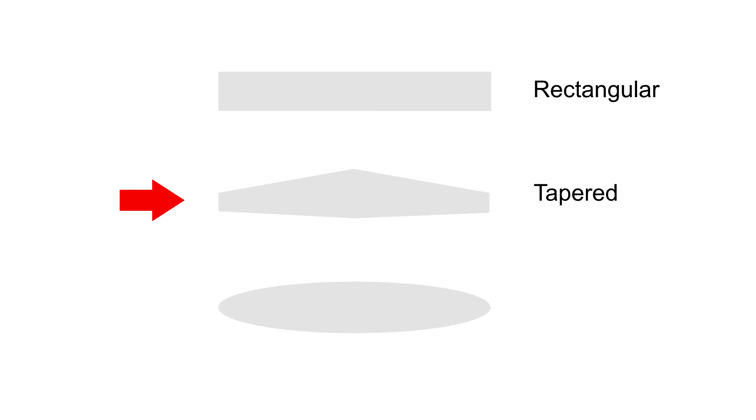Step 1 was to choose a type of wing. There are 3 main types: rectangular, tapered, and rounded. The rectangular wing is used on trainers and light aircraft for simplicity and good performance, because it's simple to design and build, as we only need to make one straight cut.

It also has good low-speed performance and gentle stall characteristics. A stall happens when the airflow separates from an airfoil, which causes the airfoil to lose its lift, which is not good for an aircraft.

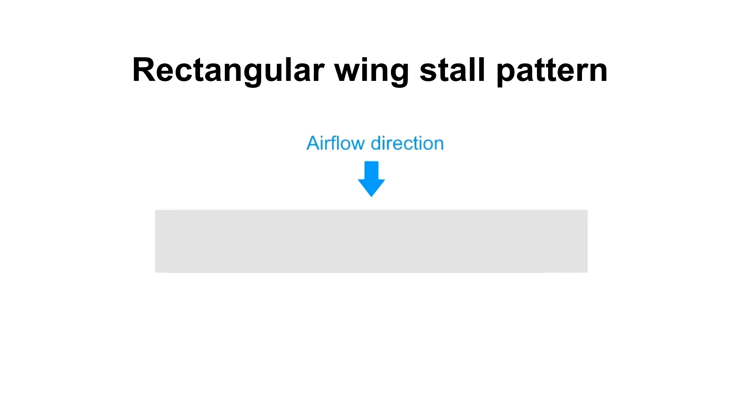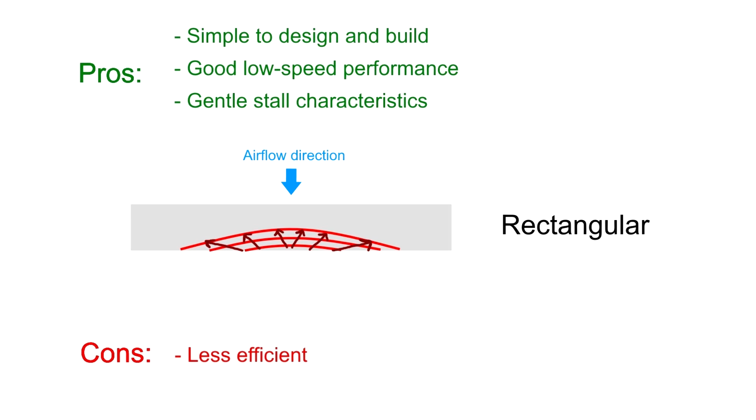In rectangular wings, the stall starts from the root, which means we have plenty of time to react, because the ailerons remain effective when we need them the most, and the stall isn't aggressive. But rectangular wings are less efficient than tapered and rounded wings.

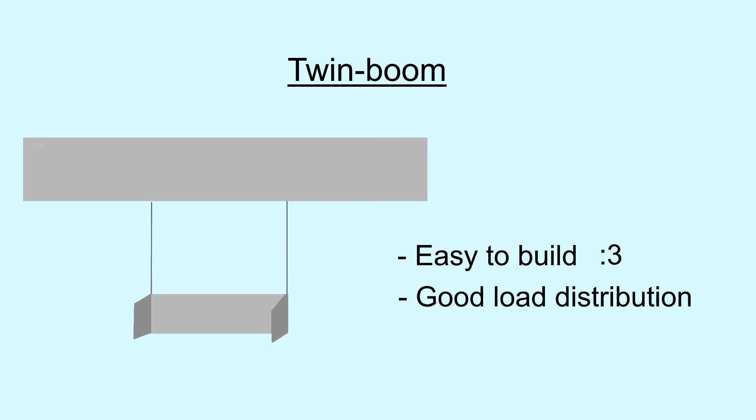For this plane, I went with a rectangular wing in a twin boom configuration, because of how easy it is to build, and because of its good load distribution and predictable stall behavior.

I went with the popular Clark Y airfoil, because it has gentle stall characteristics and good lift at low speeds, which is perfect for a stable, slow-flying cargo platform like this.

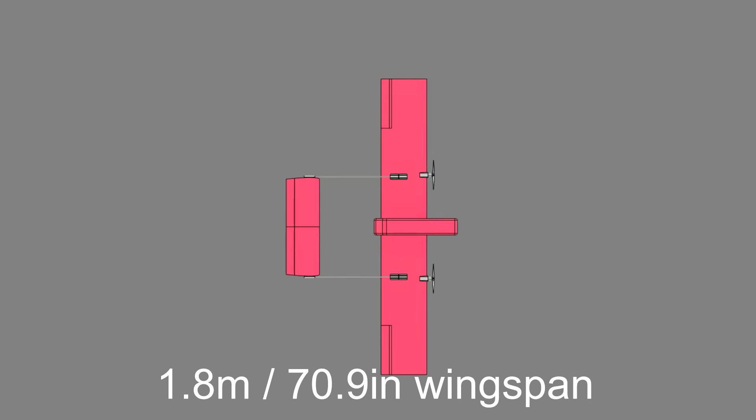It's also flat on the bottom, which makes it way easier to build, as well as mount the fuselage and tail booms onto. With 2 motors mounted on the wings and the fuselage mounted right under the wing to carry the payload, you get a stable, easy to control cargo plane built to lift and drop loads safely.

Compromising a bit of efficiency for better handling, more reliability, and much easier assembly is totally worth it for what this plane is meant to do.

For building the aircraft, I used this 50mm closed cell XPS insulation foam panel, which I first cut into pieces using my handheld hot-wire foam cutter. I had to do all of the cutting outdoors, because the fumes from the cutting may cause lung cancer.

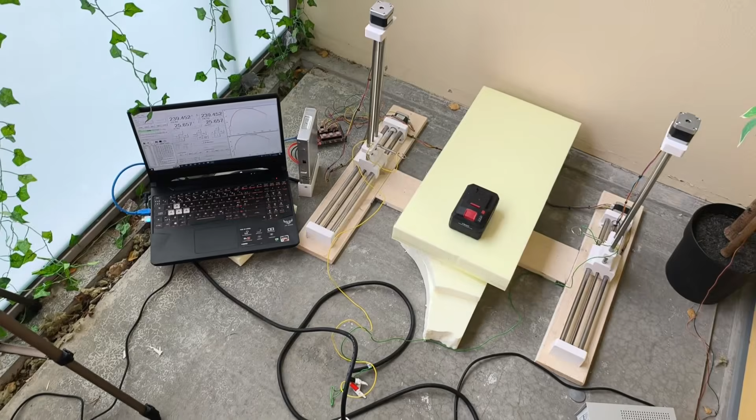I then used my CNC hot-wire cutter to cut out the airfoils precisely. Because the hot-wire cutter is so small, I had to cut out the wings in segments that I will later glue together. At some point, I might build a larger version of this machine so I could cut larger wings more easily, but for now, this one is good enough for this purpose.

After cutting all of the wing segments and foam pieces for the fuselage, the wing pieces were still inside of the foam blocks, so I had to remove them. This part of the process is really satisfying, as they all come out so easily, and the result is almost always perfect. It almost feels like Christmas, because there's so much to unbox.

Cutting these parts out with the CNC hot-wire cutter also means it's really easy to cut out the control surfaces and spar holes, which saves us a ton of time of not having to do it by hand.

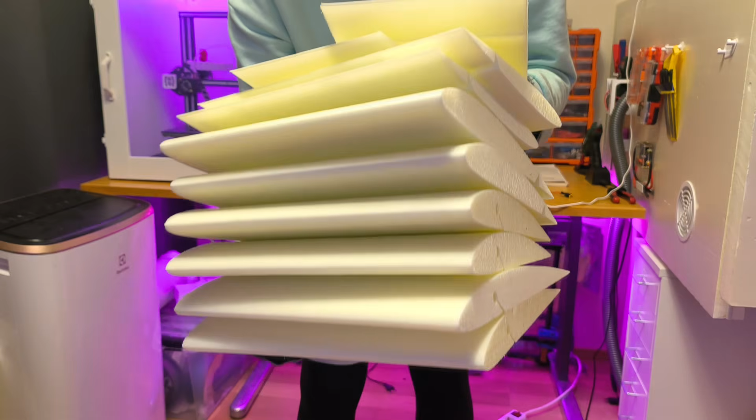For the wings, I'll use a 1 meter carbon fiber spar to reinforce the wing. These carbon fiber spars are great because they're really strong, but really lightweight and slightly flexible.

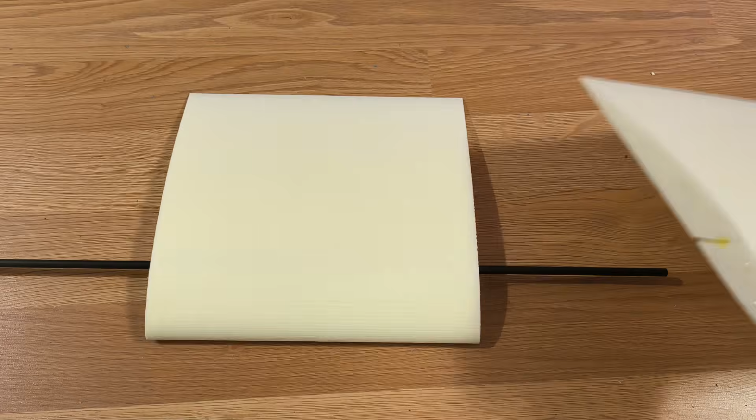Then I glued the segments together using hot glue. Hot glue is ideal for this purpose because it melts the foam and fuses it together, creating a really strong bond. It's also easy to apply and really cheap. You just have to be careful not to burn yourself, which has happened to me a couple of times during this build.

After assembling the main wing, I also assembled the horizontal stabilizer. I added these carbon fiber rods into the foam to make it more stiff and durable, so it wouldn't start oscillating during flight, which wouldn't be very good.

I then cut out the foam pieces for the fuselage, after which I assembled them together. I had to make sure that I glued them precisely at the correct angle, so that the fuselage would be the correct shape.

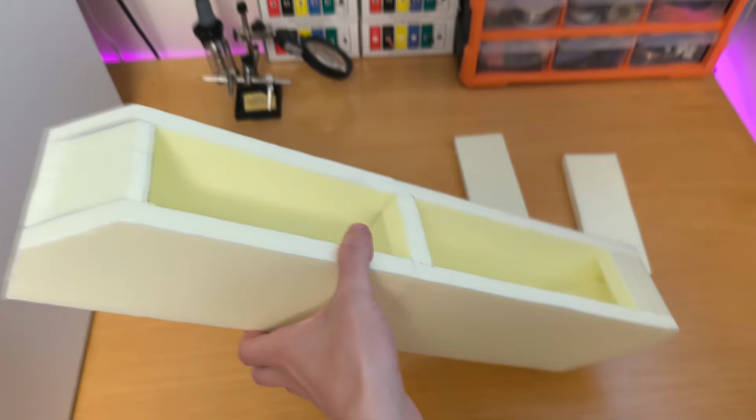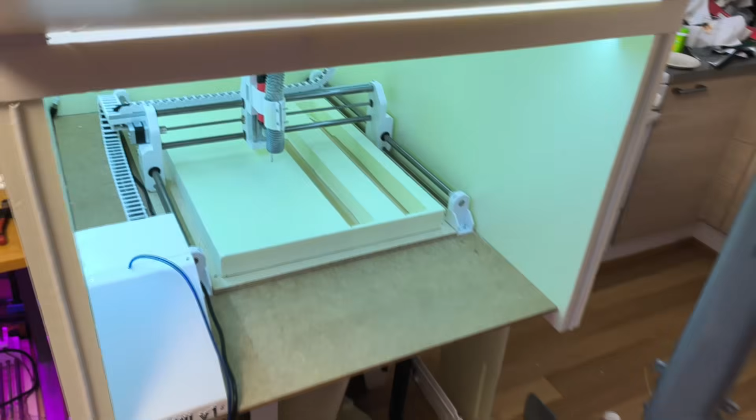Then I sanded the fuselage with some 50 grit sandpaper, just to make the corners round. To make the fuselage, I could have used my CNC foam milling machine, but I came to the conclusion that making it by hand was far quicker for this type of fuselage.

Then I prepared all of the parts and cut out the slots for the servo motors like this.

After I had prepared all of the parts, I laminated them with this plastic heat shrink film. I used this hot iron, which basically activates the glue underneath the plastic and attaches it to the foam, and then shrinks it to create a smooth surface finish.

I covered everything with this shrink film because after trying out other methods in the past, such as fiberglass and epoxy, I have come to the conclusion that this is the most durable and lightweight, yet cheapest and nicest looking solution. Together with the XPS foam underneath, it forms a really strong structure.

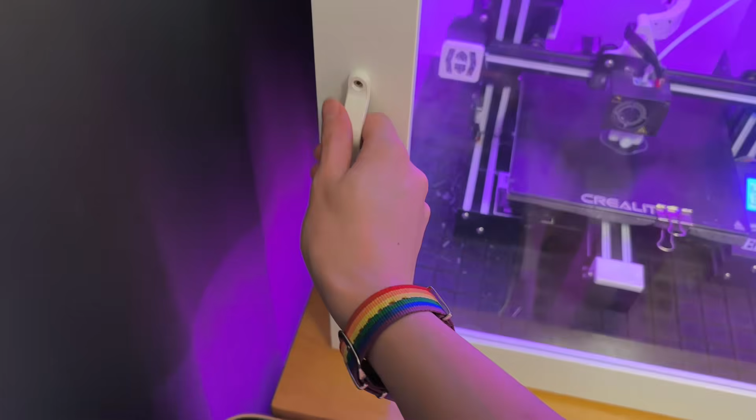Then I 3D printed all of the other parts I needed for the aircraft out of PETG filament, as they had to be strong. After that, I assembled the tail assembly and then glued these carbon fiber pipe tail booms to it.

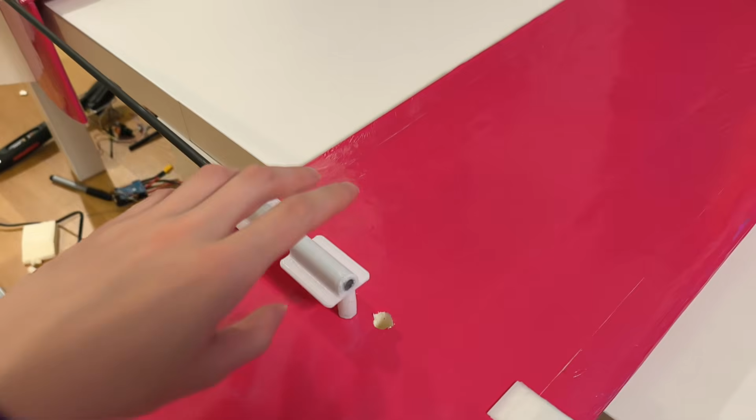Then I installed the motor mounts to the wings, and I burned my finger in here. Then the tail booms just go into there like that, and everything's screwed together.

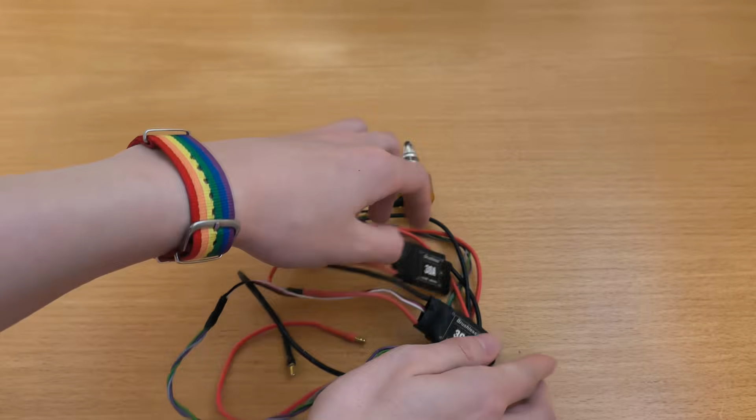For this plane, I'll be using these 2212 brushless DC RC plane motors, which will be powered by these 30 ampere ESCs. The motors simply screw onto the motor mounts like this.

Then I installed all of the other electronics to the plane, and I was able to cover up the wiring neatly like that.

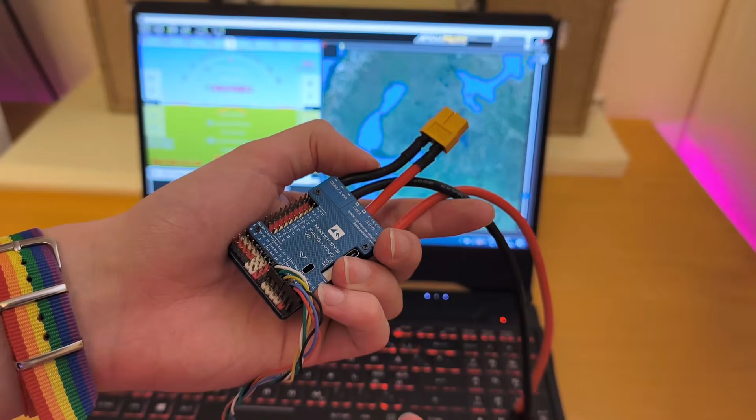In this plane, I'll be using the Matek F405 Wing V2 flight controller, as well as this M10Q GNSS and compass module. These are actually the same components that I was using in my RC boat video, and surprisingly, after putting them in rice and drying them out completely, I somehow managed to get them working without any issues, and they were as good as new.

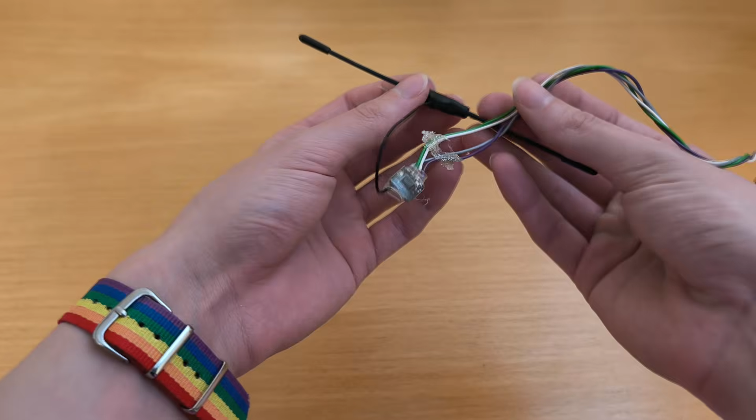Then I installed everything in the fuselage, and for the RC receiver, I'll be using this ES900RX Express LRS receiver, working on 868 MHz, which has really good range.

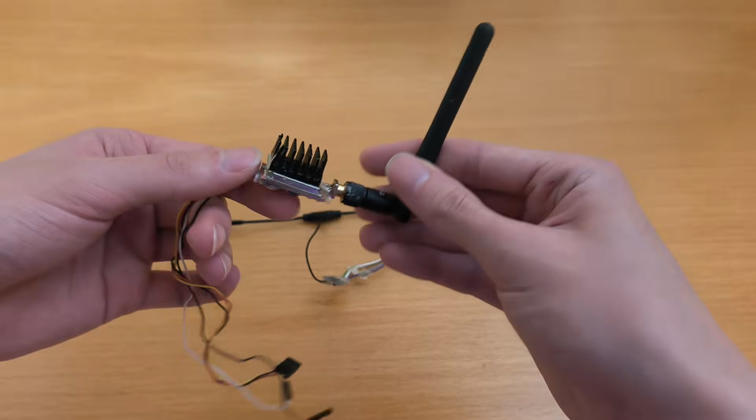For the FPV video transmitter system, I'm using this 600mW 5.8 GHz one, together with this FPV camera, as I had them lying around.

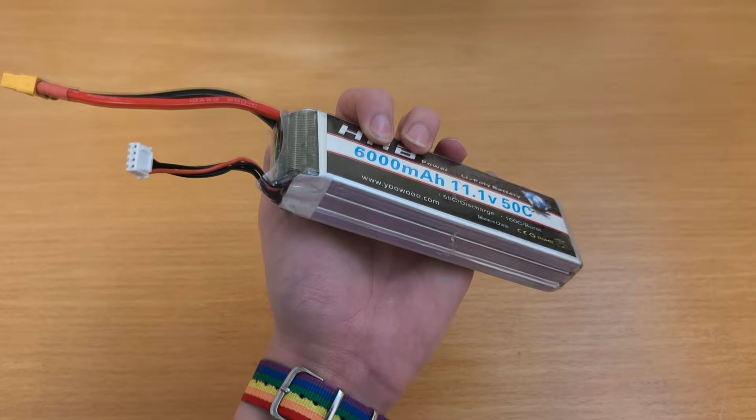For the battery, I'm using this 6000 mAh 3S lithium polymer battery. I could use a lithium ion one, which has a higher energy density, but this one will do for now.

And I had to add this NEMA 17 stepper motor into the front for the correct CG.

I also decided to add some landing gear, as I had some lying around. I had to make some mounts for them, so I 3D printed this part and then put some heat insert threaded brass nuts in there by pressing them down with the soldering iron, which melts the plastic and keeps them in place really strongly. I think it turned out quite good.

And then I just attached the landing gear to it with some machine screws.

Then I connected the control surfaces to the servo motors. To hold the wings in place, I used these big rubber bands, which are stretched across the wing and are connected to a thick carbon fiber rod, which is attached to the fuselage.

The mass of the plane is around 2.5 kilograms, and I'm using these 9045, 9-inch propellers, which are not the most efficient propellers, but I just happened to have them, so I went with them, as they'll still work almost as well, and provide around 15 newtons of thrust combined.

Then I went outside to confirm that the system works correctly, and see how it rolls on the ground. Everything seemed to be working, and the steering worked really well, with the motors providing more than enough thrust for takeoff. It didn't tip over either, which meant that I was now ready to go see how it flies, if it can fly.

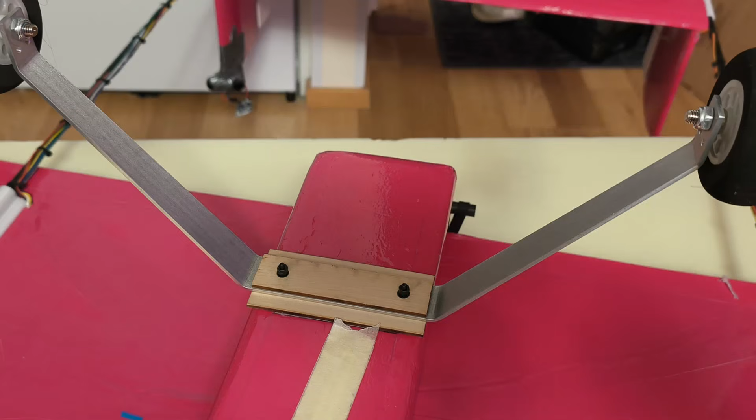I suspect that this crash was a result of both the frost as well as the aircraft being slightly too nose heavy. I also noticed that the elevator had basically no pitch authority due to its initial tuning settings, which was likely the main cause of the crash, so I fixed that.

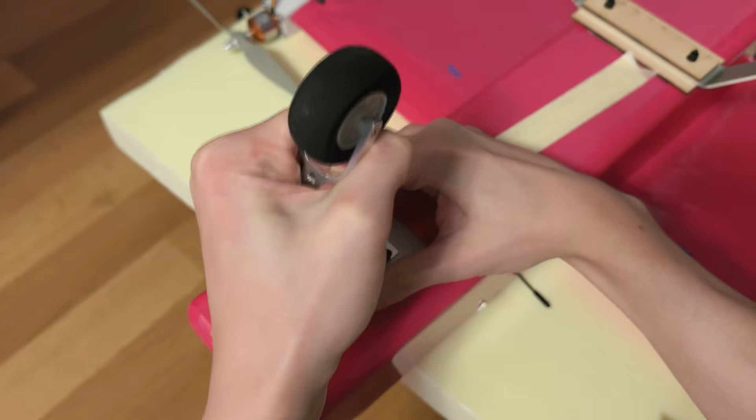I decided to remove the landing gear altogether, because the front landing gear had bent, and repairing it would have taken some time, and I couldn't properly use the landing gear in the winter regardless, so the quickest solution was just to remove the landing gear.

Removing the landing gear also reduces the aircraft's drag, and reduces its mass by around 250 grams, which should further make takeoff easier, and allow for a heavier payload. I can also reattach them later if I want to.

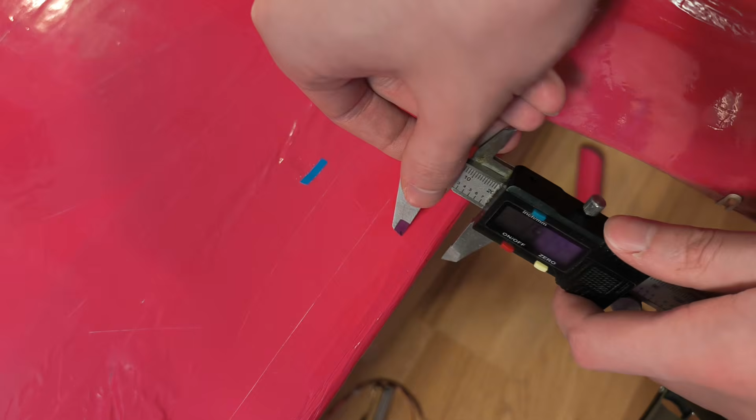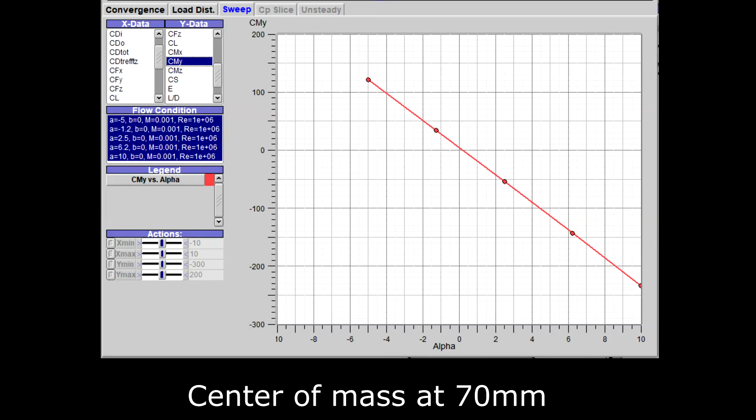During the first test flight, the CG was conservatively set too far forward at 63mm instead of the 70mm predicted by CFD. This forward shift, combined with the steep pitch moment curve, made the plane nearly unable to fly. I shifted the CG back to 70mm, which is the trim point, by moving the heavy stepper motor back by around 4cm. I also added some skids to ensure level landings and to protect the fuselage and tail.

Oh, it actually flies! Holy shit! I didn't expect this.

I think I'll probably auto-tune it right now, now that I got some altitude. Let's see how it goes. Hopefully it doesn't crash. It seems to handle it fine.

I think I'll put it into return to home mode. Like this. It seems to be doing something. It's flying by itself right now. And everything looks really good here.